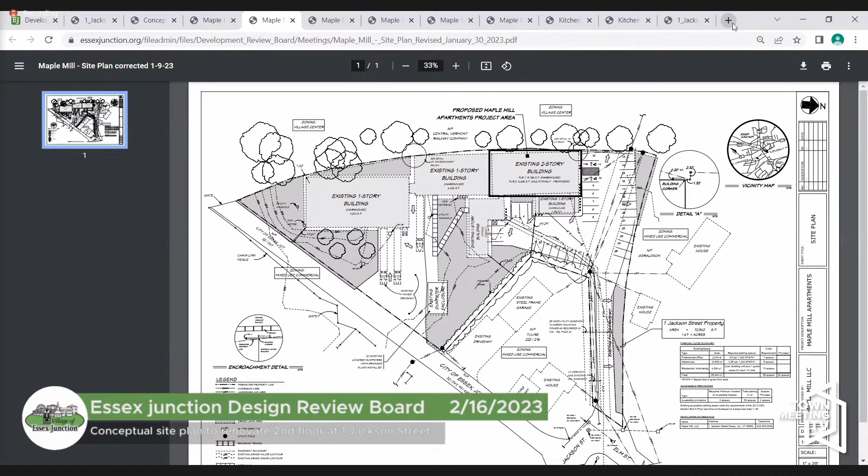I do. Yeah, the two grassy areas on the east side that Jeff is talking about, I don't know why I didn't put them on there. It was not intentional, but they are there. I went out and measured. We're short about 2 feet between the end of that stripe of the parking space you're looking to get rid of and 24 feet. And so I'm just wondering if carving that dirt out of there and filling it with pavement makes it a traveled portion of the road. The open areas of grass that are on the corner there are almost pointless in the first place. I'm not sure why they're not covered in pavement already, just the way that they're shaped.

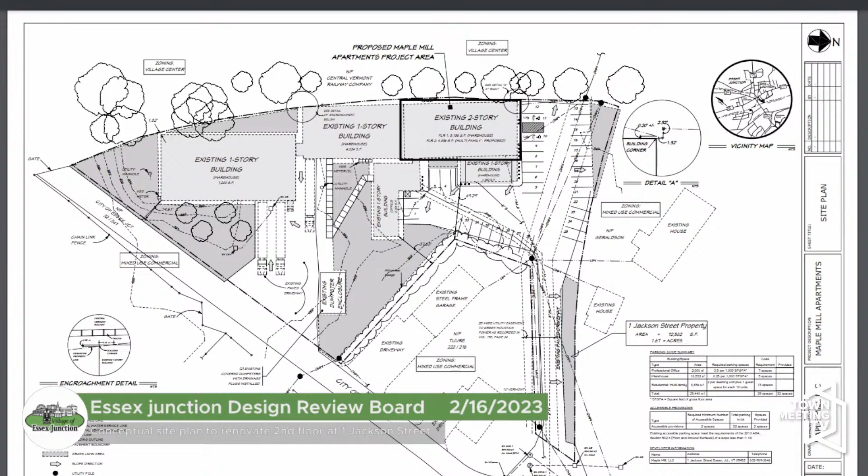And we bought a piece of property that was okay with this parking, been used for a long time by Flexaseal, and by removing those spots, we wonder what position that'll put us in, because we don't know what's going to go in that bottom space. Right now, it's considered to be storage on the first floor. It could be a use that's allowed, might be a brewery with food, and what does that do? Look at what Black Flannel has up on the hill. Lots of parking, but it's full all the time when they're open. So I'm wondering what happens then.

And I'll let you finish. Do you have a little Google Earth image, if I can pass that around? I didn't submit it here, but where we're talking about, I can come and point to you guys, those are the islands that are there.

So up against the building more? Yeah. The ones we're talking about are that one and that one and that one. And there was discussion with staff that there's a lot of maneuvering going on, especially in the corner over there with people backing up, and we thought we might just give them some more space. So we're talking about these two? Yeah, those are the islands and then these are the parking spaces. Yeah.

I'll add to that. We've been in there as tenants / owners of the building, running a business in that corner for 3 years now. We never had any problems with traffic. I personally parked over there probably 50 times and I don't remember the islands. If you look at them there on the screen, they make hardly any sense to me while they're even there. Well, I'm wondering if they're new, I think that,

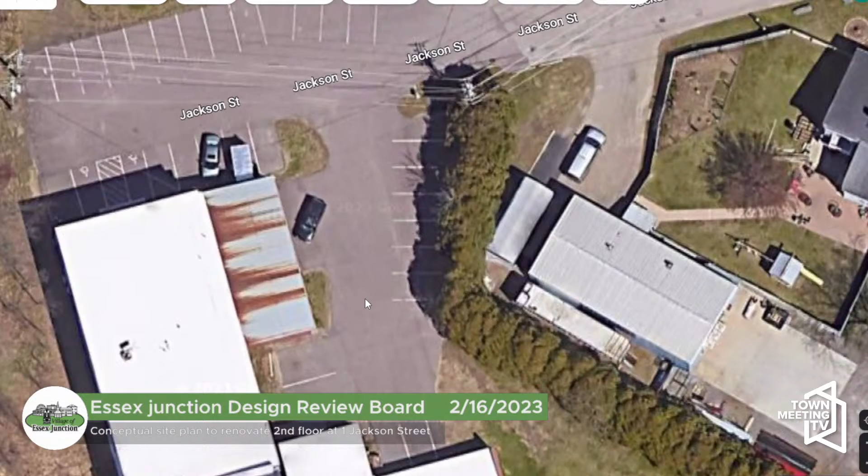previous owners put in. Doug and Fernando put in, I think. Yeah, I don't have any documentation that goes back far enough or shows them. Actually, I've never seen it on a drawing before. I think they added an overhead door maybe to that little shed. Oh, that shed, right where that black car is parked, that shed was a delivery spot for all their panel trucks. So shipping and receiving essentially came out of there, as well as the overhead doors on the larger metal portions in the back.

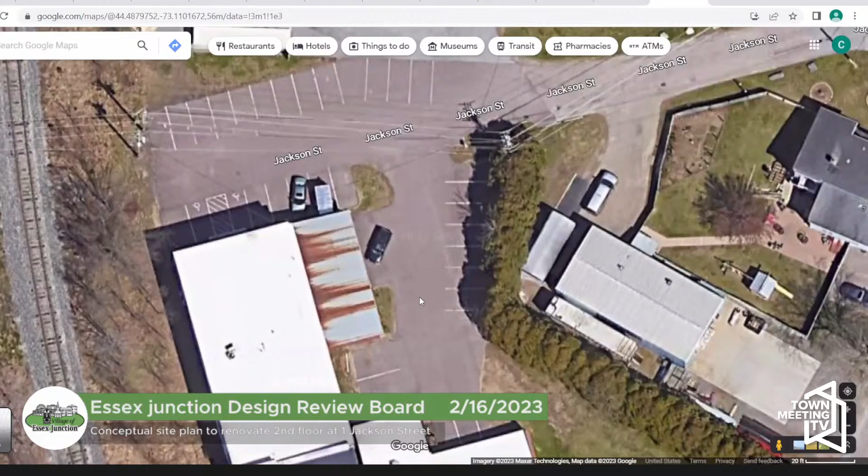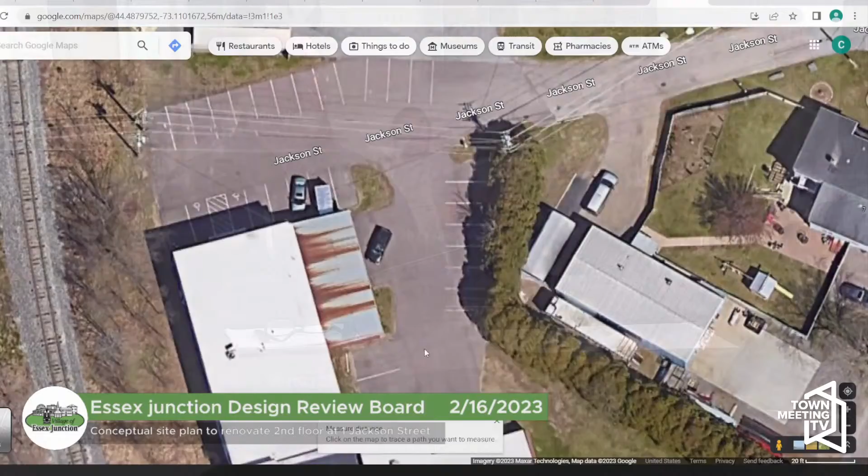Yeah, I mean, that image says a lot, and I did measure that off. I think we're about 2 feet and change short on the measurement up to 24 feet. But I do understand what you're trying to accomplish, and I'm certainly not opposed to doing it, I'm certainly not arguing. Well, let's keep talking about it because there's some other topics that were involved in residential use and landscaping that we haven't talked about yet. So let's keep going. Okay, of course, I'll keep plugging along.

So another bolded item is building height. I don't think this is any question, but the elevation views said they were not to scale. So I don't know how tall the building is. I just need the applicant to look at us and say they're less than 58 feet. They are probably less than 30 feet, but they're less than 58. Yes, thank you for that. I was gonna say, even if they're not, you're not gonna do anything about it. Correct.

Well, there is one taller section that used to have an elevator or some kind of a big hoist. And it's just out of the picture on the screen here, just below that. But I don't think that's even close to maybe 40 feet or something like that. Yeah, the north edge, which is the top of the screen, right there, has got, I don't know what the architect would call it, a wall that sticks up above the roof line in the facade of the building by like 3 feet. Parapet. I don't disagree, I'm just not in a position to guess.

Just so you know, this is one of the oldest structures in the village, city. It was heavily involved with railroad activity and was built for that purpose. And it had a number of different parts and pieces to it. The newer pieces were added for the maple canning operation. It had a big chimney on it, which I think got taken down, right? The base is still there. Can't move the base. The base is still there, but the chimney, which probably did exceed 50 some feet, and guy wires and everything, they're all gone now.

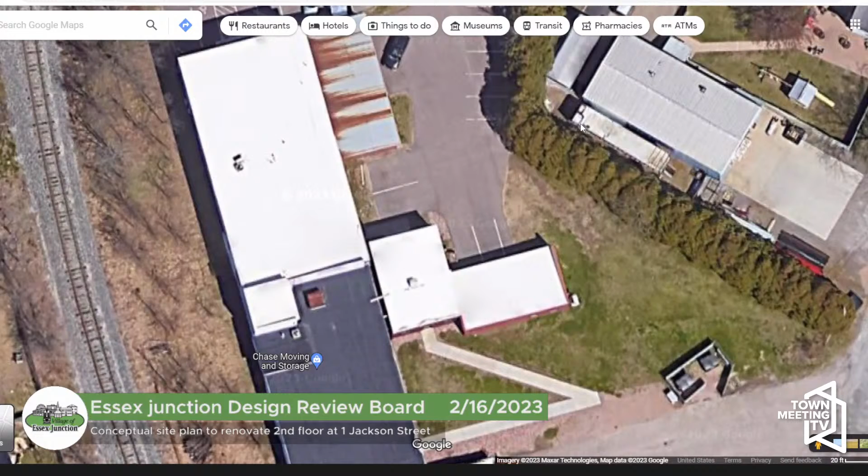So what you have there is still, in many ways, historic, even though it's industrial historic. It still represents an interesting chunk, and I would argue that you're not tearing anything down or lowering it. I'm not suggesting that. All right, good. Next, what was the next item?

It's related, it's a little bit later, but I want to talk about the access drive because we're talking about this aisle width and access drive. The code says if we have two-way traffic, we have 24 feet wide. And the existing access drive that serves the property from Elm Street and Jackson Street is less than that. It varies from 21 to 22 in general. I'm just bringing it up because it doesn't meet that code requirement. I'm not suggesting that it needs to change. It's existing and they're not proposing anything.

But as we get down a little bit further here, one of the other items of concern is now that this is a residential use as opposed to some industrial type use, we have pedestrians that are going to want to come and go to this facility and to their homes. And the obvious destination for them is Elm Street and the sidewalk network that's on Elm Street. And there's really no way for them to walk other than walking down that road, which is already less than what the code would require. So I bring that up to say, hey, the road is a little narrower. Perhaps we should suggest a sidewalk or some other provision for pedestrians to get down through there.

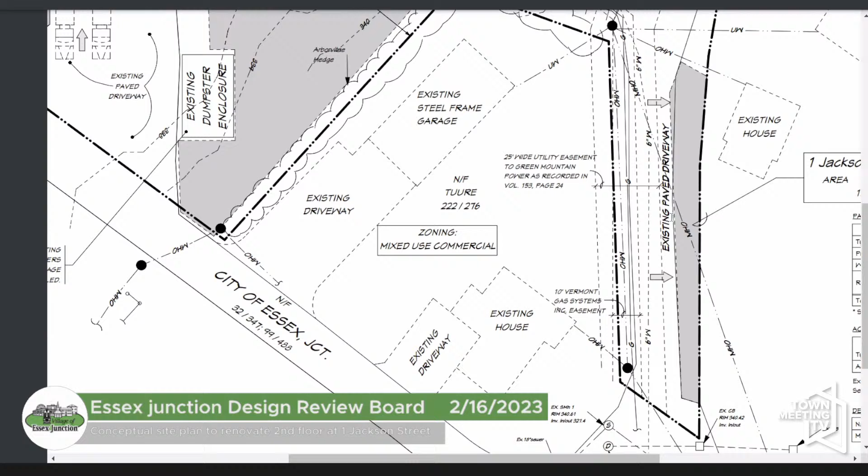Bicycle racks: because the parking lot has more than 15 spaces, it requires a bicycle rack, and we're proposing that they provide a bike rack at at least one of the entrances, either outside or it could be inside. The code doesn't really address interior ones, but staff believes that would be adequate to have one inside. There is a fairly good size foyer in there.

Lighting is another one. Because we're introducing residents to this property now, that means coming back from work when it's dark out in the winter, perhaps even leaving when it's dark out in the winter in the morning. So we're thinking that lighting is appropriate for the parking lot, just for safety. They're proposing some building mounted lights that are not providing the minimum light levels in all of the parking area that the code would require.

There's a lot on the perimeter. We go from pretty bright at the building at those building mounted lights to almost no light at the perimeter. So it's not very uniform, which is the goal of what the code is trying to do. So I bring that to your attention. Let me zip ahead because there were a couple other lighting items that I should talk about from the staff report.

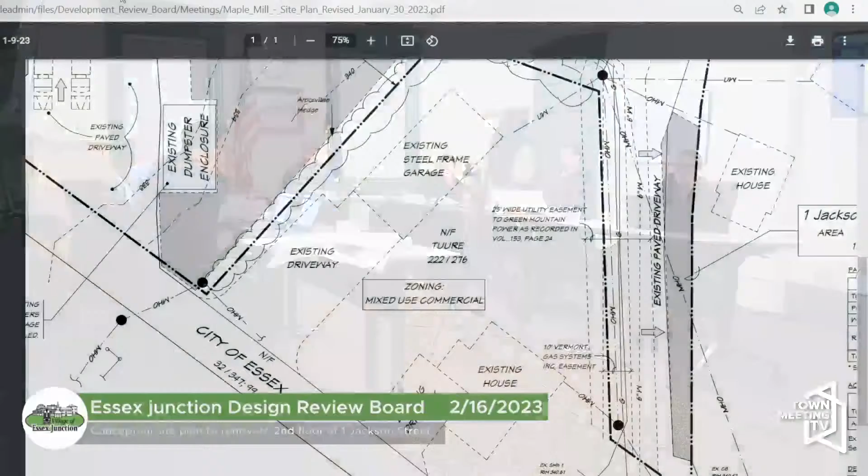Okay, so all the commentary about the curb cut and the access drive, that's all kind of lumped in together. It's all existing. The code gives you guys the ability to say this is okay. That curb cut is okay. We're not going to require changes to it. It's at a funny angle. It's skewed to the road. It's not the width it should be. It doesn't have all the right radii, but it's existing. How long has it been there? Probably longer than me.

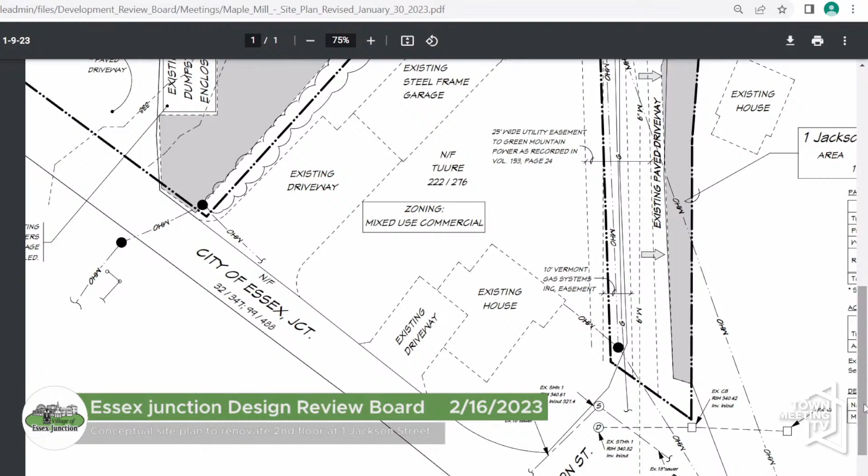Oh, it's up on the roof and it's like one of those units. It's 4.5, 5 feet high, sitting on the base. I mean, it's like all the others that you see around town, right? Everybody who puts in these mini splits. Rooftop units are enormous in some places. 81 Main Street and the doctor's office next door, they're 6 feet high. Yeah, in Maple Mill, they have these huge ones. So I don't know what that part of the code is about. Are we really limiting the height of rooftop units without screening or something? That's what it says in that one section that's in there. And so I just bring that up.

Yeah, I mean, if we need to get a variance or whatever, how do you go about that? Just let me know. Yeah, we'll talk to staff about that because my own feeling is if it's existing, again, you're really only here for a fit up and a site plan. So if there's an existing something on the building and you don't make it worse, I don't think it requires any action from us. That's what I was going to say as you were talking. If it's there today, no problem. But all of a sudden now we're going to introduce these 6 units. I could see more air conditioning units coming up or some other thing. Now they fall under the purview of the code at that point.

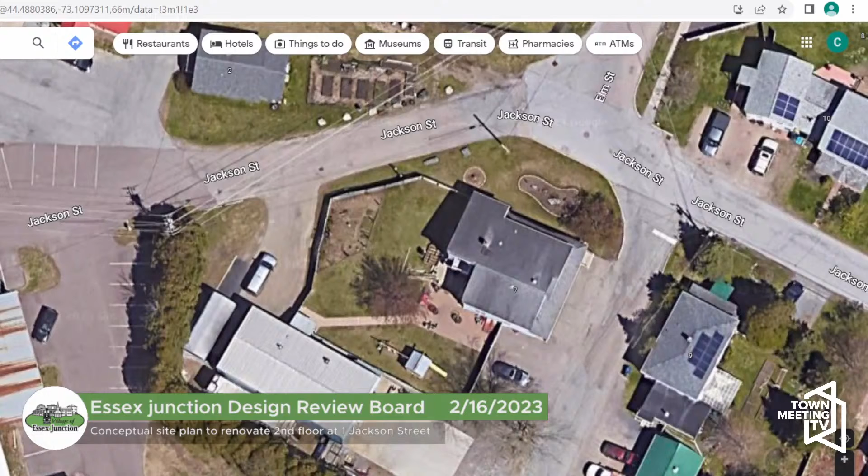To add to what you're saying, and going back to the lighting, I looked at the zeros along the borderline, the top left corner of the screen. There's a little triangular section of grass. That is our line; the grass is ours. The lighting dies out along that edge, probably 5-6 feet short of the pavement, because there's a neighbor right there who actually lives there. It's not a commercial building that's vacant in the evening. There's two: Adam lives there, and the little white house at the top. So the lighting people thought we'd kill it short of the line so there's no trespass issues.

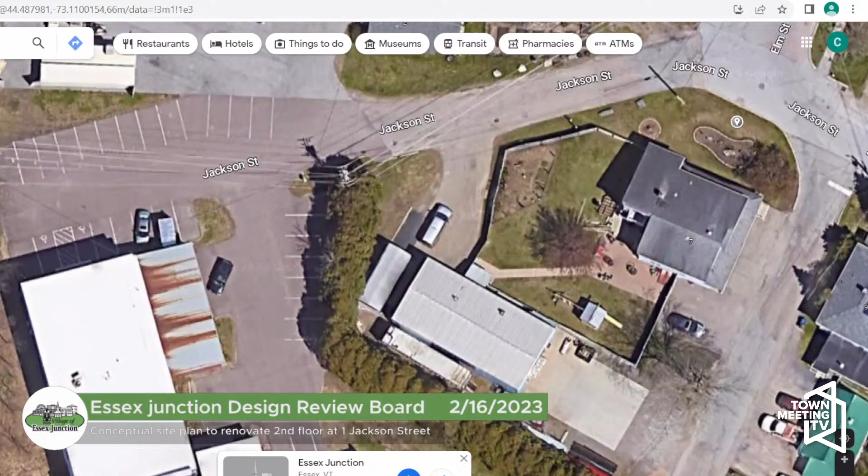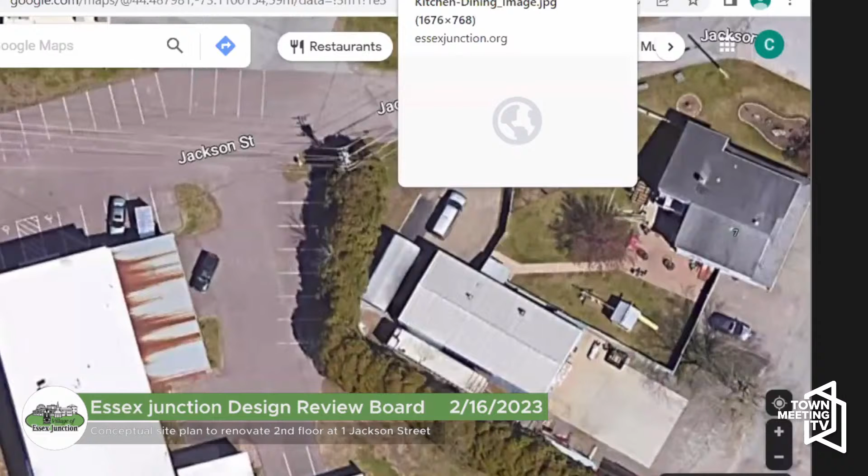The color temperature issue: they are selectable light fixtures, and I think that was just a little slip of the thumb on the typewriter. But the foot candle levels, I understand completely. There's a uniformity factor that needs to be met from highest foot candle level to lowest, so I will work on getting that resolved. And there's plenty of electricity back there. It all goes overhead; probably the whole city's electricity goes across my parking lot. So we should have no problem solving a lighting issue.

The only other thing that I hesitate to bring up, but I will, is that we have had problems with the general community using our driveway and Adam's property to go to the railroad tracks and cross over, kids and some troublemaking activities. So if we all of a sudden put a sidewalk there, does that increase traffic coming onto our private property? I want people to be able to walk. There's a lot of dog walking in that area, and I like that whole feel of that area.

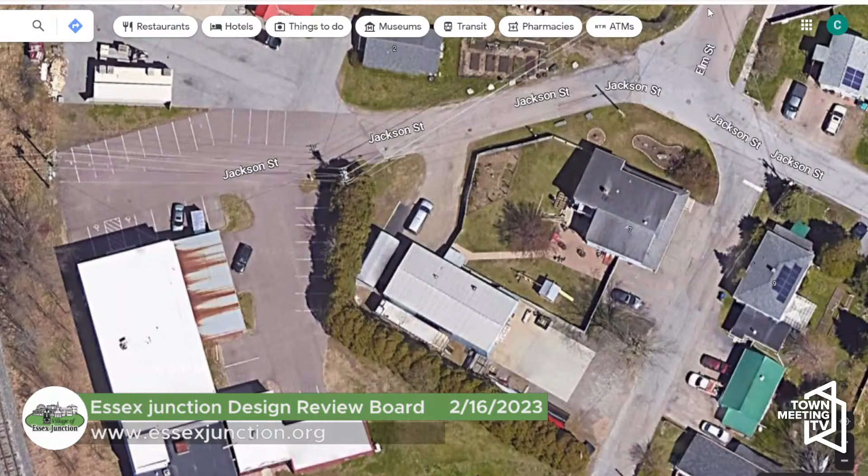It becomes less private when you put apartments in, though. I mean, we still own it, but people live there. Yeah, that's all kind of died down ever since Adam got a face shot of one of the kids and went to the school and said, "Do you know this kid?" And they said, "Oh yeah, that's Elijah."

So the next time the kid came through, they said, "Hey Elijah, how you doing?" And the trouble stopped. We don't know that his name was Elijah. No, we don't know if his name was Elijah. I just made that up. I'm just saying.

Adam, because he lives there, was very helpful. He was watching stuff. Having people there in an apartment will end that. Yes, okay, that's what I was thinking, because there's people there at night, right? More eyes, yeah. But a little bit of lighting is gonna help that. Yeah, that's true. Maybe one of those motion sensor lights. We'll go back to the people and see what we can do.

Yeah, just for the rest of the board there, that little triangle of grass is new from the last owner. It wasn't there before. That was an auto body shop, and so that was another commercial use at the time. Now that it's got a residence in it, it probably changes the character a little bit. I mean, it was one big chunk of pavement all the way across there, and it was really hard to figure out who had what.

It had cones and rope and some other stuff set up, and wasn't really ideal either. So I'm actually happy to see that there's more definition to the property areas there, but it may also give you an opportunity to do something about the lighting, and hopefully it can be done so that it doesn't bother the other neighbors there.

So I will say from a staff perspective, in terms of lighting, I see the highest importance is to have it in areas where you have a lot of car backing up traffic, just because cars don't have headlights in the back, and we will have people of all ages potentially walking there.

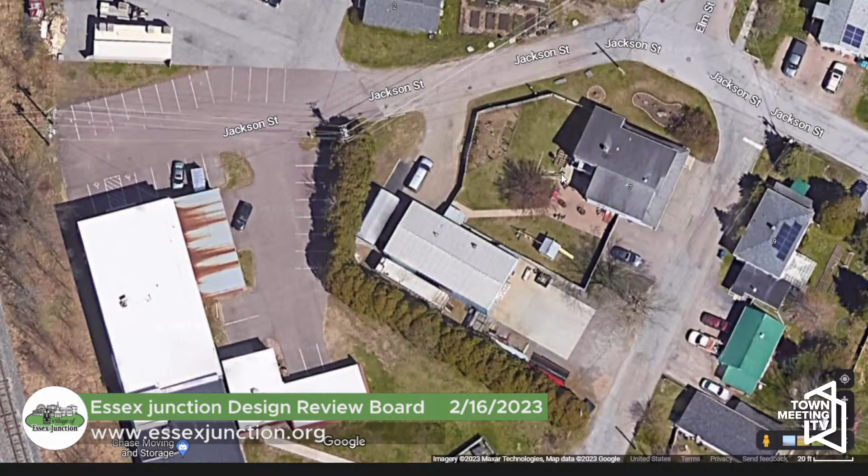So as you guys bring in a new tenant type, I think there's a little burden on you to show what else comes with that. Gotcha. And so we don't really care what's going on in your apartments. That's up to you. But outside that, we get to talk about that. So we're gonna make suggestions and we're gonna tell you to go read the land development code for what we're looking for, because we've tried to put some things in there.

And we're not saying you have to do everything that we list, but you might want to make an effort to think about those couple of things, like the lighting, the safety, the pedestrians walking into the middle of the, I just gotta call it the village, right? I mean, the city.

But you know, how do they get there safely? And it works for you too. You might want to walk in and get a bagel or something. Well, are you going down the tracks, or are you going some other way, or maybe you're walking over to the park to take a swim at noon when it's nice out in the summer. Maybe think about what you can offer for the residential units. And there are only 6. I just want to point that out. We're only talking about 6. It's not the whole building.

The only thing that I was pretty firm on was having an outdoor faucet so that people could wash their dogs off before they brought them into the property, because we have wood floors. So that's one of my hopes. Do a little dog wash, yeah, because dogs get muddy. And the bike rack thing is big.

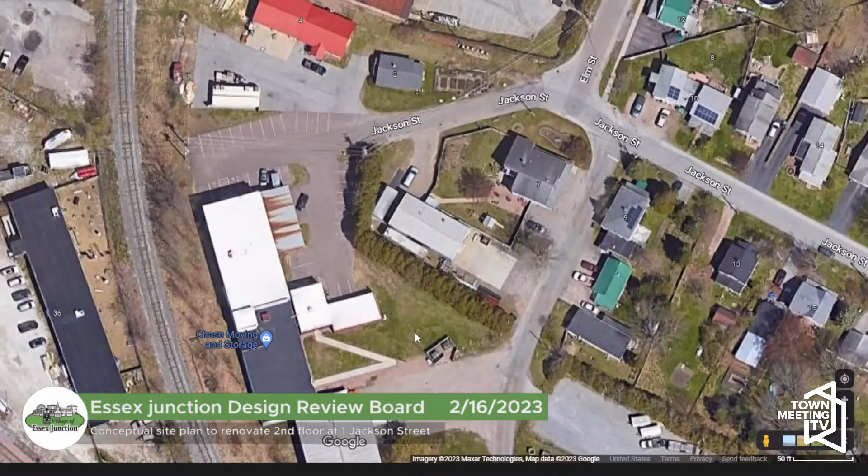A lot happens on those tracks. I don't want to know. And there is a doggy daycare right behind our building. Not anymore, they're gone. Oh, okay. That's getting bulldozed. Oh, well, okay, sorry.

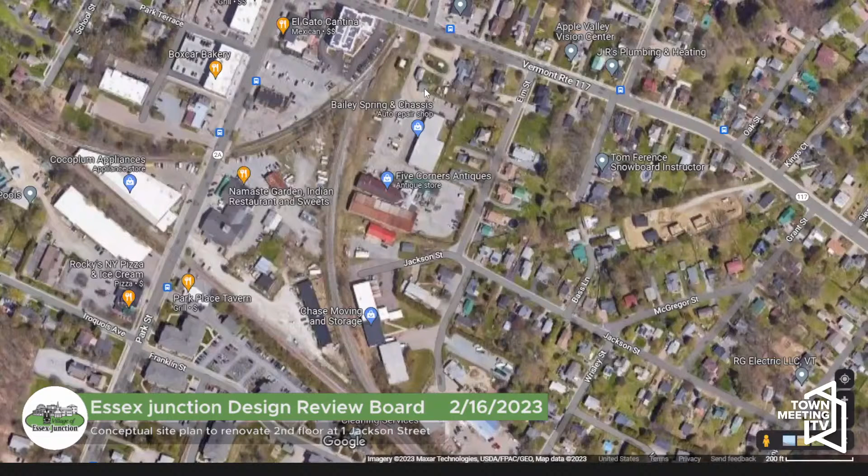When the Crescent Connector goes in, there'll be a way to get across the tracks without just walking across the tracks. You'll actually have a road there. That's part of the Crescent Connector, and when that goes in, this neighborhood is going to be much closer to Pearl Street and Park Street than it is now, and easier to access. Oh, that's great. So you might want to stop in and talk to the city staff about what that all looks like in the future, because it's going to be a game changer for that neighborhood.

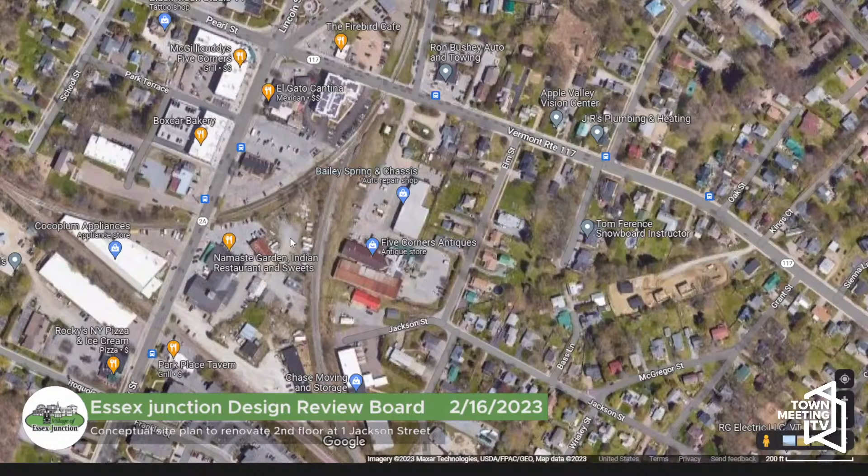Okay, so I'm going to suggest a motion to approve the conceptual plan with consideration for the requirements in the LDC that have been pointed out by the city engineer, and with ongoing consideration for the other items we've talked about, including safety, lighting, and pedestrian connection. Does that work for people? Anybody want to add something? Can we have a second? Any further discussion? All in favor, say aye. Aye. Motion carries unanimously. Thank you very much, everybody.

This is what happens when your wife is out of town and she comes home right before your meeting. You leave without exactly what you thought you had to go with. All right, so that's the public hearing. Good evening, Brett.

For the next public hearing, we have another conceptual site plan to remove several existing residential buildings and construct a new building with 34 studio apartments with parking at 227 to 229 Pearl Street in the MF/MU1 district by 227 Pearl Street LLC. I see we have two representatives with us. Would you like to introduce yourselves?

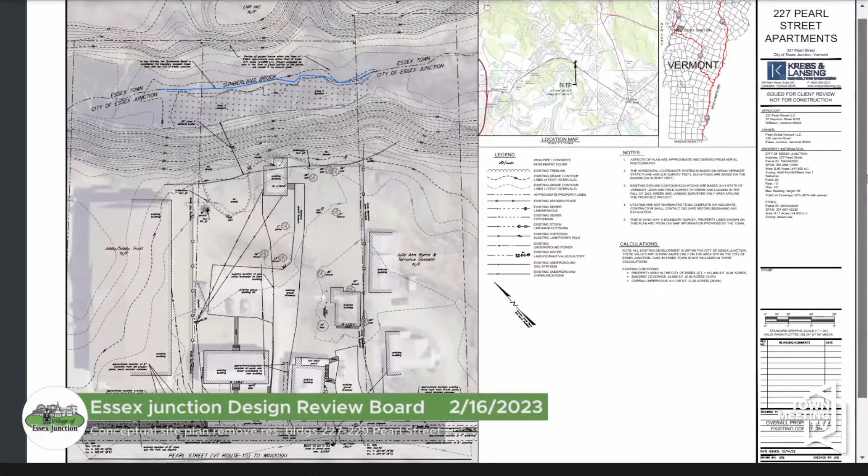So this is the existing conditions plan. We did an on-the-ground survey in the fall of 2022, as well as trying to identify as best we could a lot of the utilities within the Pearl Street right-of-way, which is a little bit messy, but we're still working those out. And then if you wanted to jump to the next plan, you can.

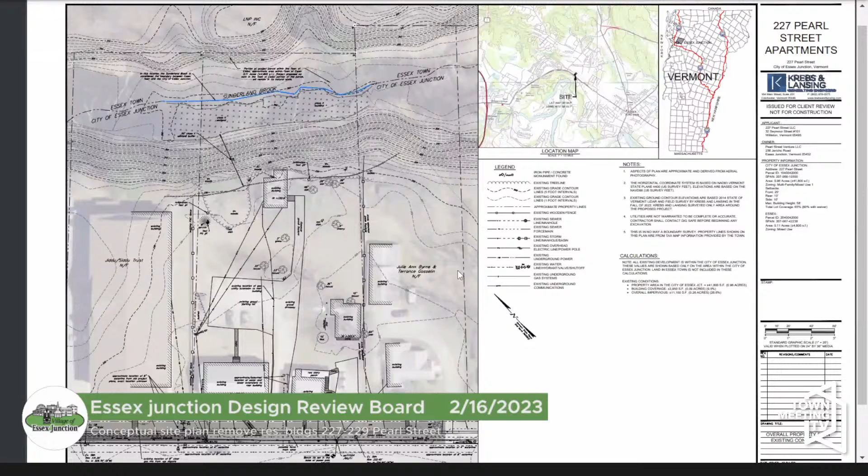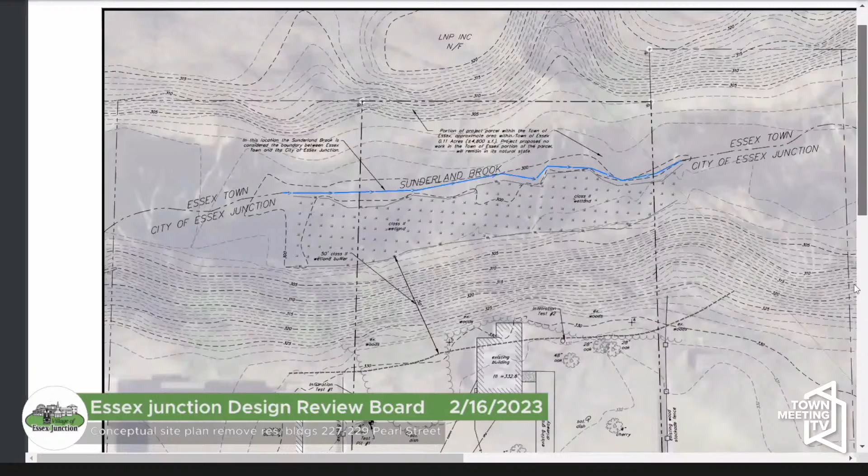So just while you're right on that one, you have 3 structures that are there now, including one that's kind of drifting into the setback for the stream there? The buffer? Yeah, that back house is existing. It's there. Right. It's not falling in, but it's obviously there. So you're going to clean that up for us so we don't have to worry about it. Yeah. I mean, we've actually already

So the topo that's on the plan with the proposed new building footprint is the actual topo. We've actually delineated the brook already, so the setback is a 50-foot setback from the wetlands that was delineated in the fall. So we've already done that.

And the monitoring well that was listed there, what was that about? So that was a monitoring well. We did some test pits and some infiltration testing to do some preliminary work with stormwater. Okay. So we wanted to get that done before the ground froze. So we identified that stuff early, pretty much about the same time that we did the topography as well.

Our intent is to move that house. This project will have to go through Act 250, and therefore will be reviewed by ANR. I think it'll be a conversation that we'll have to have with the wetlands department. I think removing a structure within the buffer will be a pretty easy conversation to have, but it is something that we will have to discuss. They still consider that a disturbance, even though it's a good disturbance.

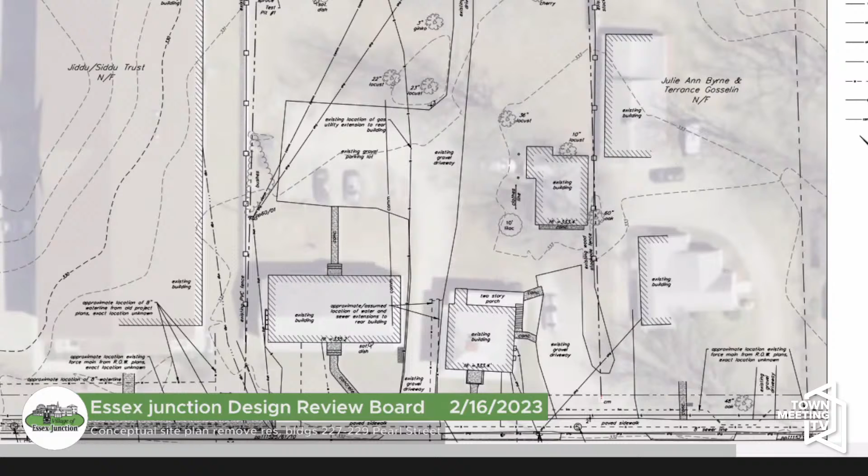Unfortunately, yes, but I do believe the threshold for meeting the EPA Clean Water Act, if you're taking it out and revegetating it, you don't really have to prove a lot of the big issues that there would be if we were going the opposite way. Yep. Awesome. All right. Anybody else have questions on the existing site plan?

Yeah, there were some comments from staff, because there's some reference in there to approximate property lines. The property has been surveyed. We know where the pins are, and we've done the necessary research, so we do know that the metes and bounds are correct. There were a number of disclaimers on the drawing, so maybe we weren't quite sure if that's

Yeah, I think I put that it is in no way a boundary survey because I didn't do the boundary survey, but we did get the boundary survey from Hamlin Engineering. Okay. So they gave us the lines. Oh, actually, Larry Burke did it. Larry Burke actually went and did the boundary work.

So is the normal thing going forward to have a little note on the drawings that says this was taken from a survey done by so and so, so we can all be fairly comfortable? They hadn't produced it yet, so that's why I didn't know yet. Ah, okay. Got it. But now they have produced it and given it to me. No worries. So when we come in on the next one, it will say plan based on survey by Larry Burke, dated blank.

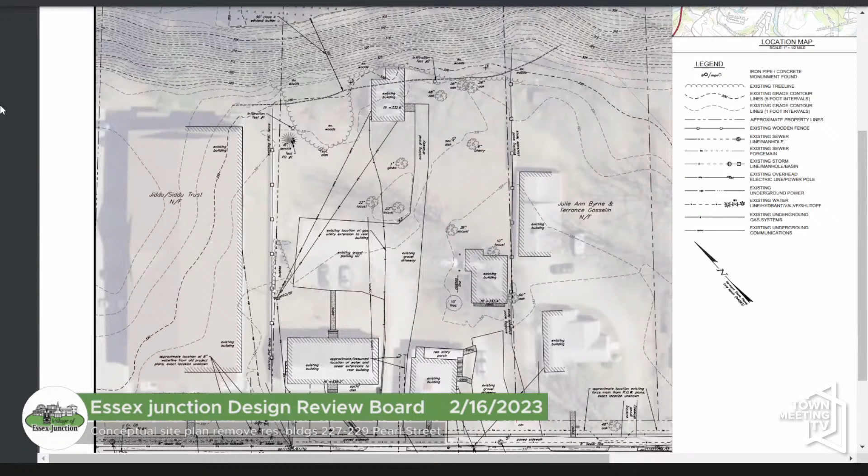But they did give me all their line work, and we located the same pins that they found when we did our survey work. So we feel pretty confident that we're showing pretty much the exact same thing that they have. And Jeff, as far as ANR and all the stuff that might happen with Army Corps and fooling around with disturbing inside the 50-foot buffer, they're going to take care of all that, right?

We don't have to. They really will, and I think other than taking that out, I don't think you're doing anything in there. We are not. You're proposing making it better in this case. All right. I don't know what you're doing for stormwater, and I could see maybe stormwater in there, but I think it's important to note just up front that this is a conceptual plan that you guys submitted. There's a lot of comments here.

There's a lot of shots over the bow, if you will, of here's the things we're looking for the next time. Yep. That's basically what a lot of these comments are. There's a lot of them, but I'm confident you guys are going to meet those. We're just bringing them up. We run it through the code. Here's what we're looking for. Should make the next submission go.

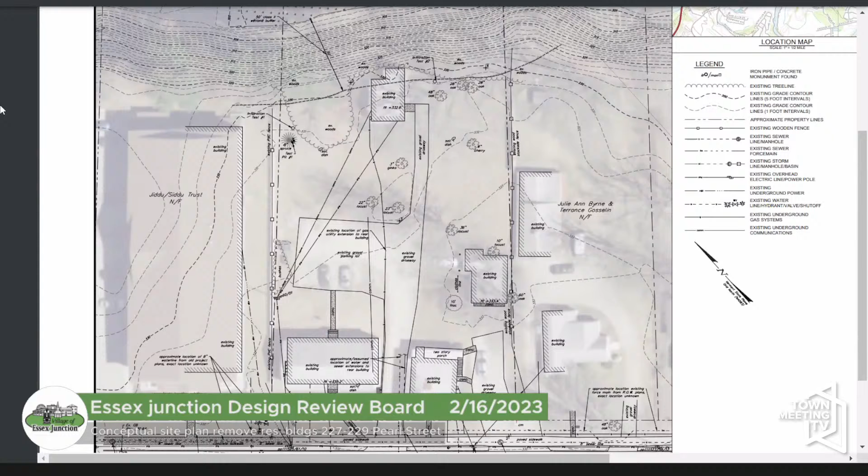Yeah, a lot of the comments you made were expected, obviously, and we actually have all the information teed up to basically put on plans and kind of move forward with this. So a lot of the work has already been done on the comments that you've made. I just wanted to bring that up because there's a lot of them, and I expect that you would expect them.

All right. Regina, I'm not sure that those engineer comments were in our packet either. So I wrote Terry and asked for the Maple Mill set, but I neglected to ask for these, but I don't think we had them either. The engineering comments are summarized in the staff report. Yes, in the staff report, I think. Okay. All right. So just walk us through them so we don't miss them, because they may be a little bit new for some of us.

I can do the same thing. I'll zip through very quickly. There's again a lot of them. I'm just gonna say I know you'll meet them. There's just a couple that I think are worth flagging. The property line, we've already dealt with that one. When you tell me property lines are on a tax map, it just raises a flag to me. And then when I see you on the setback, we don't want to be in an unfortunate spot where the building gets built in the wrong spot, and then we've got to deal with it.

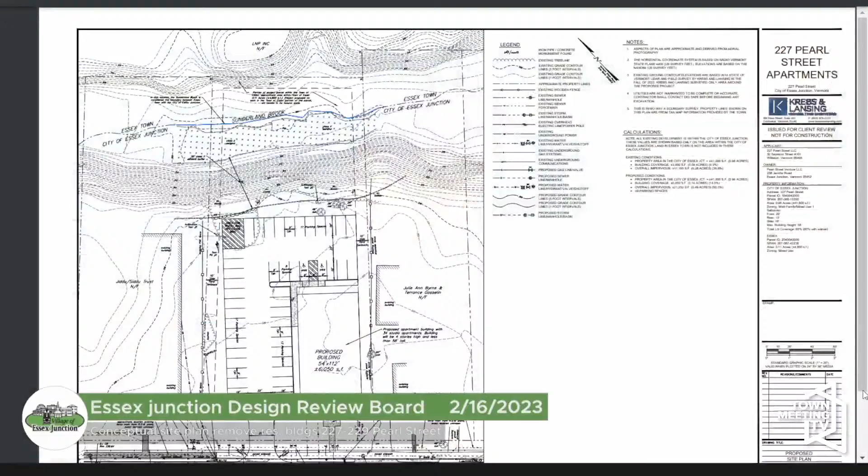Parking. And while you're doing this, can we go to the proposed plan, Chris? Yes. Parking requirements. So the land development code requires a total of 71 parking spaces for the proposed building. The applicant's requesting a waiver to allow 49 parking spaces. The comment that staff made is you should provide some supporting information in support of that waiver request based on a similar type of use. That information has since come in. Staff has looked at it and finds it acceptable. That adequately shows support for the parking waiver. The numbers are based off of 11 Park.

Yeah, I read the letter too. I thought it was great, and that's exactly the kind of information that is helpful to have for any of us to be trying to make a decision like that. But in general, we would like to make sure that we're not just paving the world so we can say we have all this parking. I think we've done that already. We don't need to do it anymore. So I appreciate that. It makes a big difference.

Knowing that these are all studio apartments, and I know Greg touched on that first, you might get some pushback from the DRB a little bit because we want to know how come you're not taking care of 1, 2, 3 bedroom type units. But I'm guessing the answer is that you can't rent those, and all the energy is in renting the studios or the 1 bedrooms. So maybe you can talk about that, but we're not quite there yet. Yeah. Okay, so obviously building elevations will be coming.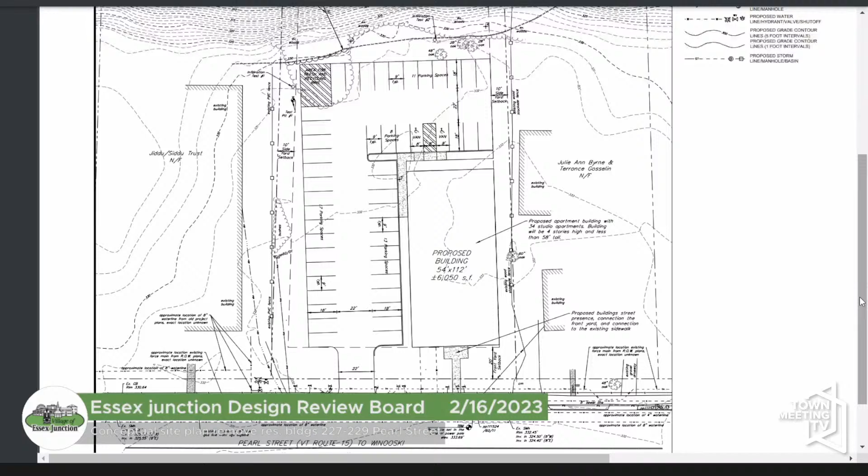I do think we could probably use the front yard for that a little bit too, and try to pool stuff towards the front of the building without actually going onto the road. With the infiltration testing, I do not expect this to actually hold water. In a normal storm event, it would fill up a little bit and then infiltrate pretty quickly.

As part of reaching out to the wetlands department, we might need to have some sort of drain for the rooftop, as well as the foundation drain of the building. That might have to go towards Sunderland Brook. Stormwater is allowable in wetland and buffer areas, and it's just a conversation I need to have with them, because I think the depth of both of those is probably going to exceed the ability to bring it back up to the surface. But it's something I'm looking at right now. We do fully intend to have quite a bit of stormwater. There's really no other place to put it back here.

So we're going to kind of put it in a shallow grass-lined swale on what is showing the left side of this site plan, as well as another shallow grass-lined swale kind of at the top of the bank in the rear of the property. Yeah, and this is kind of further down, I might be jumping ahead, but what we did not provide you is any rough sketches of the building itself, but we do anticipate it to be 4 stories, flat roof.

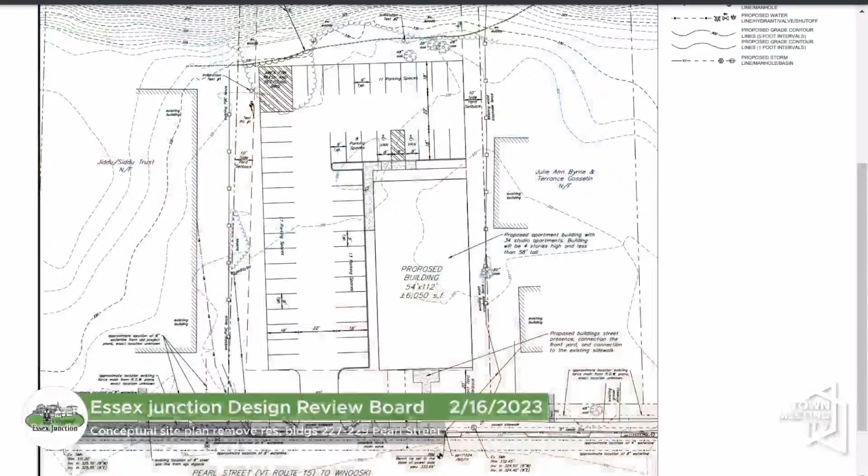We talked about the property lines, screening, buffering, landscaping. None of that's at this level, but it is something you guys will want to look at. Bicycle access: with the number of spaces, staff is recommending that you put bike racks at the front and the back. They could be inside as well. With the basement, all the units are going to have storage facilities. So yes, we can certainly provide bike racks at one of the entrances, but everybody is going to have private storage in the basement. Essentially, that's your inside bike storage.

I think when we come with the next plan, we can just certify that a bike could fit. Yeah, that's fine. Given its location, I could see biking as a mode of transportation. Oh, yeah, certainly. It's perfect for it.

So again, lighting in the parking. Sorry, Jeff, can I just ask? There will be an elevator, I presume, and will the elevator go down to the basement? Has to. Okay. So no lighting was shown. That'll be coming. You've kind of heard a little bit about lighting tonight, so you know what we're looking for there. I highlighted the waiver sections and the sections of the code that you guys will want to pay attention to in granting any waivers for the parking spaces and that parking width if you choose to.

The curb cut and access to the public street, again, that one's proposed at 22 feet wide, where it exits and enters off of Pearl Street. Staff doesn't support 22 feet there. We'd love to see 24. And so maybe there's a happy medium. That's not to say that you can't approve one and not the other. Maybe it's 22 in the parking lot and 24 at the entrance. I don't know. But I'll throw it out there that I think that you have the ability to do one or the other or both or neither.

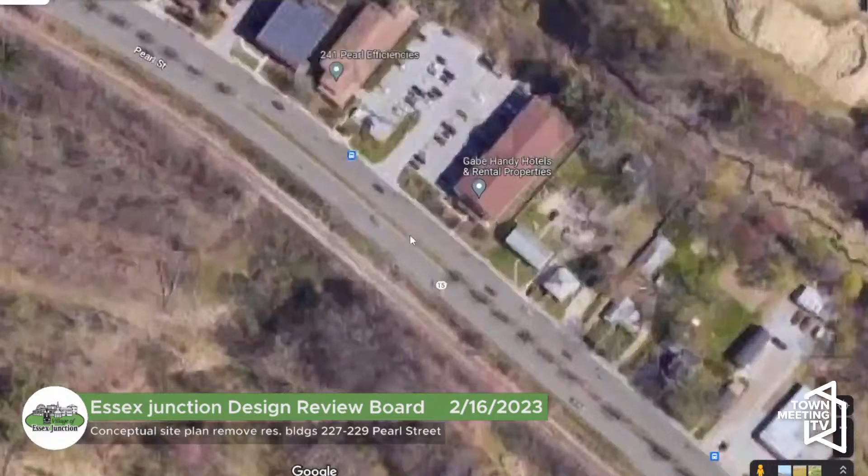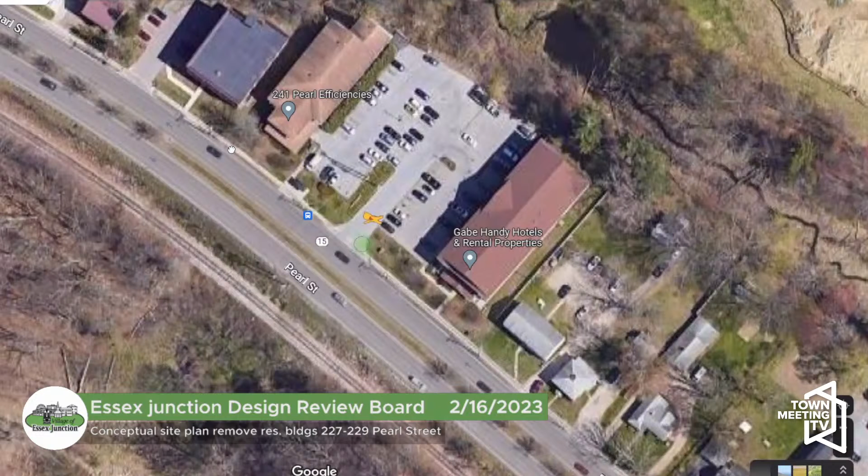So just to bring up the bus thing, over in 241 Pearl, we actually have some units with no cars. And they're actually carpooling and busing it in. We have some traveling nurses that don't have cars, and they're busing it into the University Health Center, because they're either busing in from here or parking out on Pine Street and getting bussed in from Pine Street.

So their two options are Pine Street or Fanny Allen, or from home. Yeah, so they choose home. I don't know if you have any authority on it, but I think there's no bike lane in that section of Pearl Street. Probably not. The bike lane ends. I mean, that's another thing.

If you're having studio apartments, that's a lot of... my husband bikes to the hospital. I don't think we have room in there. Bikers are on the sidewalk, or I don't allow him to ride his bike on 15. So that bike lane ends in that portion. So that would be something. I don't know who can make that happen, but that would be nice.

There is a plan, isn't there, Regina, for a center lane or some kind of multi-purpose? There just seems to be a lot of people living there now. They just rebuilt it for the fort. Yep. So right, there's this multi-use path that is being put in. Oh, that's right. It exists now. That goes.

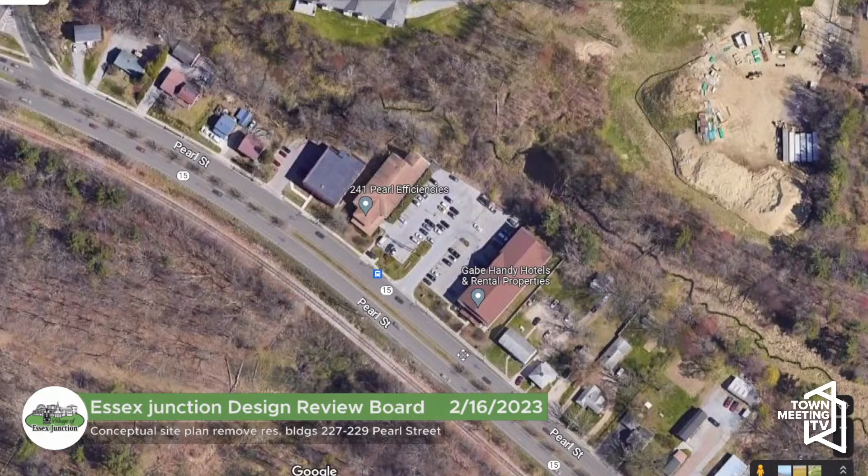This section of Pearl has a scoping study for reconfiguration of the road. There's currently no timeline for when it will be implemented. And there's no conclusion to that scoping study, so it needs to be brought back around. But there is a strategy and a plan. It just needs to be figured out. So it's not soon, sadly. But it has been thought about.

Well, the other part happened by the fort, which was amazing. But how long did that take? And I think as the applicants, we'd love to see it, but we can't do it. Once you're by the fort, it was less pressure anyway. Because anyone that's tried to bike that knows the rigors of not wanting to be on 15 directly, but trying to make it through there.

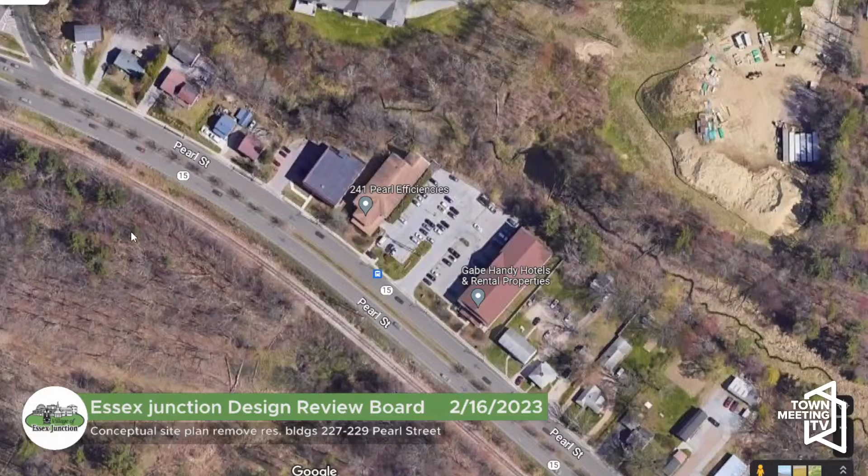So I think generally speaking, you're absolutely right. It's an ideal place to continue the large scale housing. We've said it time and again that putting it on major transportation routes is ideal. And this is one of them. And so it's a pretty helpful continuation of the big picture regional planning to get denser housing in that location. So we're starting off on the right foot there.

Do you have more comments? I think I have two more. Just to alert you that as part of that final submission, we will be looking for existing as well as proposed sewer and water demands. I'm assuming that you are going to need additional allocations, so you'll need to work through that.

And the last one I'll highlight is to just alert you, Greg, to the land development code details. For any work that's inside the right of way, you need to follow the land development code details. It happens all the time where we get a sidewalk detail that's different than what's in the land development code. On your site, you can do whatever you want. Outside in the city's right of way, it needs to comply with those. So it's really easy to just use those.

Copy and paste or redraw them, whatever, but you need to use those details inside the city right of way. It's a comment that comes up a lot, so I just highlight it to you. Yep. It'll save a little bit of work. And that was that. All set, unless you guys have other questions for me or the applicant?

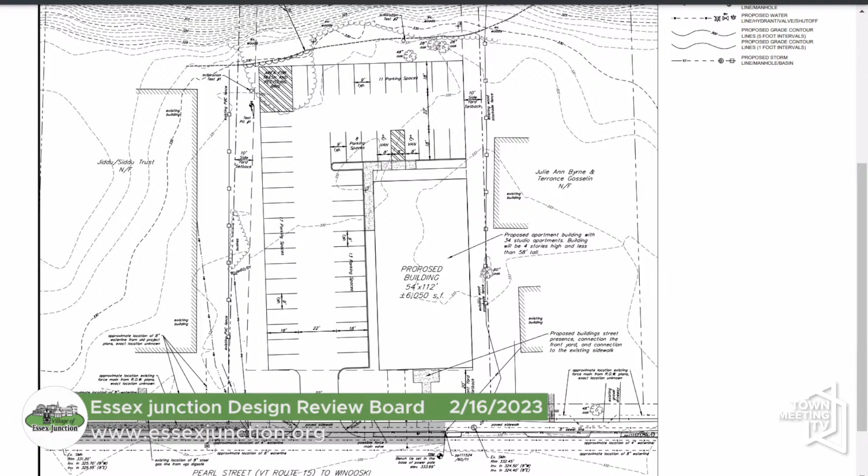I think, as you might expect, the bulk of our landscaping will be in the front of the building. The review for the building itself, when it comes, you might have your architects just consider showing us a streetscape, what's there, take a picture or something, because what's there is already pretty interesting or not, and we're sure that this will have the ability to improve that. It's not going to be hard to improve on the existing buildings that are there. Yeah.

Can I ask a question about the existing buildings? I don't know if I'm allowed to ask this, but I'm gonna ask it anyway. Yeah, please. How many apartments are there now? There's 7 total. Only 7? Yeah, there's 4 in one, 2 in the other, and then the structure that's about to fall into the ravine, there's only one there. It's a small single family house. What happens to the people who are in those 7 apartments? So as of right now, they're not all occupied. There's already some that are vacant. Oh, okay.

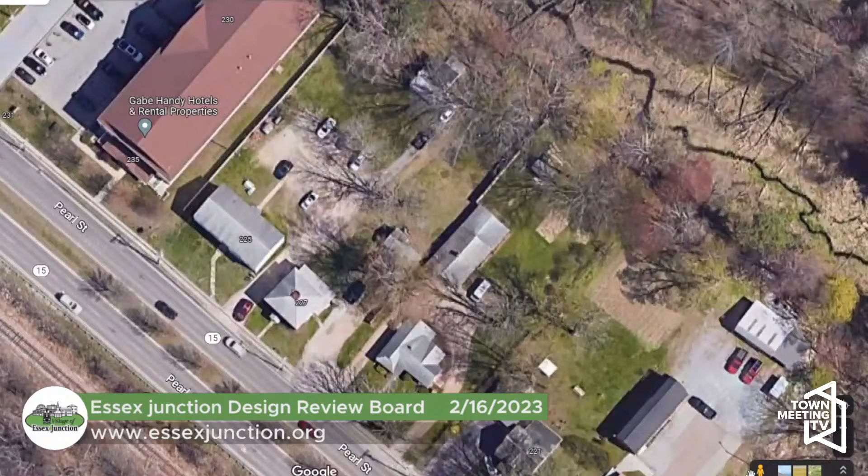Everybody is aware of what's going on here. And so we've obviously told everybody that we're going to give everyone ample heads up in regards to the specific timing of this. The house on the right, one of the units is actually occupied by the brother of the owner that I bought this from. We've already been talking with him about relocating to another apartment that I own. Yeah, I'm just thinking of the housing crisis. Oh yeah, we're definitely well aware of it, and that's why we're giving everybody as big a heads up as possible in regards to all this.

And it works to our advantage as well, because if you surprise people with this or do not give them adequate heads up, in this state, it's a tenant state, they'll just dig their heels in. It's going to take you 6 months to get them out. So you're better off working with the tenant to try to find alternative accommodations. Okay, that makes me feel better. I actually thought there were more apartments than this. Yeah, no.

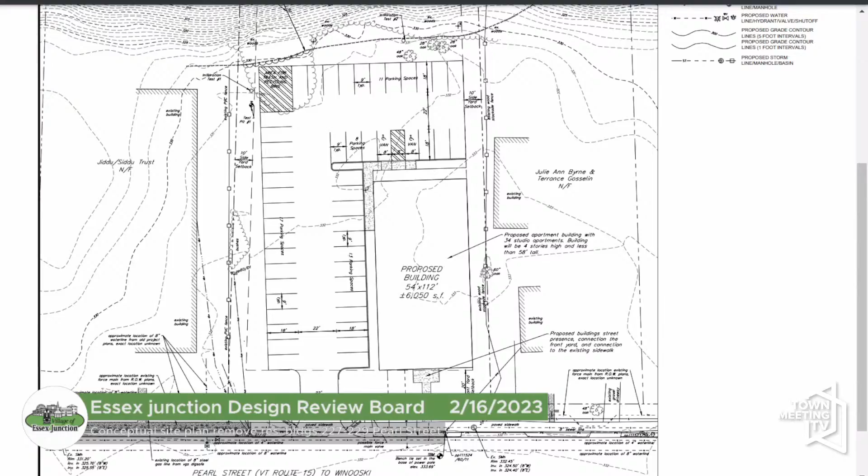Other board comments? Staff have any more comments? There is a public comment that came via email today. Oh, good. And this is from Steve Eustace, who is not an abutter, but he is a city resident. His comment is mostly about the fact that some of the sidewalk that exists today is 5 feet 6 inches wide, not 5 feet wide.

And his request is that the new sidewalk that goes in here would also be 5 feet 6 inches wide, as opposed to the minimum requirement we have in the code of 5 feet wide. He does lots of running in this area, and the extra 6 inches feel helpful. But just so the board is aware, the LDC requires 5 feet wide. It's something you certainly could request, but not something we could require.

What's the rest of the sidewalk along Pearl Street? Is it just 5'6" in this section, or is it all? I'm not even sure; I think it's actually a smaller sidewalk. There's no bike lane there, so you might want to make it bigger because you'll have the bikers and the walkers and the runners. I actually think that part of the sidewalk is smaller than the other parts. So I would spin it around the other way, because I think what we would probably do is match.

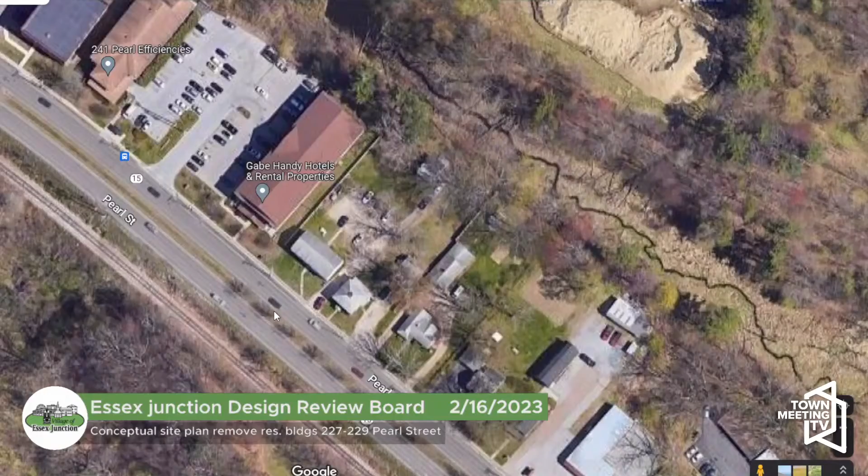Yeah, I can just say in terms of what's there, he's measured the sidewalk width throughout between West Street extension and 235 Pearl, and it averages 5 feet 6 inches. We'll match whatever's there. That's fine. I think that's a drastic expense. All right. Anything else? Any other comments? Nobody else on camera?

As you guys know, I like infill sites, and this is exactly what I really like to do. And as we told you at the previous hearing, think about the things that you're able to offer for your residents in terms of amenities. One of them is location. It's ideal, but they do like to do stuff outside, and access. You're right on the access, so that's fine. But I think the bikeability, we've had discussions when we developed across the street here, and the benefits of developing infill projects like this, the biking I think is huge.